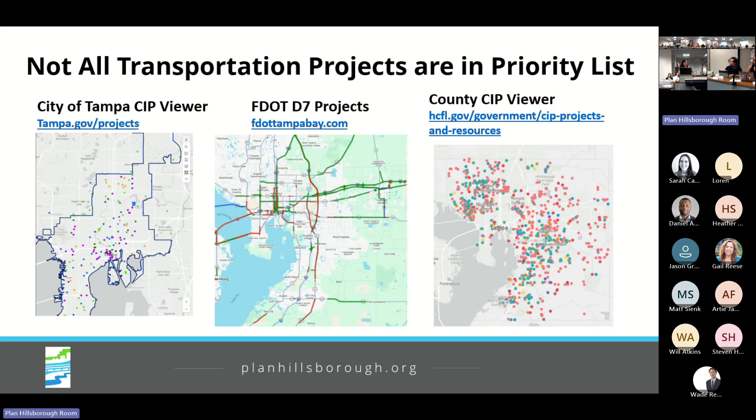I wanted to make sure it was very clear that not all needs or transportation projects are going to be on this list. The TPO priority list is one piece of the puzzle, but our partners at the municipalities as well as DOT have capital improvement programs, 3 of which have viewers online, so you can see all the different capital projects being advanced in the region. But this priority list is really focused on those TPO funding sources, which is about $20 to $25 million per year.

So a couple things have changed since previous years. The first thing is that you're seeing this earlier. Previously we would have brought you the TIP as one item in June and the priority list as another. But this year we're going to separate them a little bit, bring it to you in May, and then we'll talk in more detail in June about the Transportation Improvement Program.

This is a small change, not even a change, but we try to be really intentional about how we call this. You'll notice the dates on the priority list and the TIP look similar in format but different. The priority list is called 28 to 32, because it really informs the TIP you'll see next year, which will be called the 28 to 32 Transportation Improvement Program.

The second major thing that's changed is we've updated the format and added more information as an attempt to have additional transparency, so that anybody who picked up this document could have a better sense of where this project is in its development and what the TPO's recommendation is on it.

So just to walk you through this in greater detail, we have a little bit more than we previously did on that project description. What is it? What is it trying to achieve? We have called out in a tabular way all the project phases to try to communicate what's needed, when is it anticipated, and how much will that phase cost.

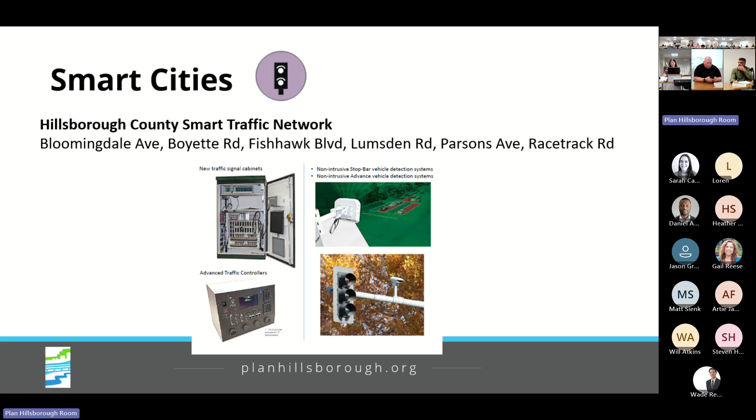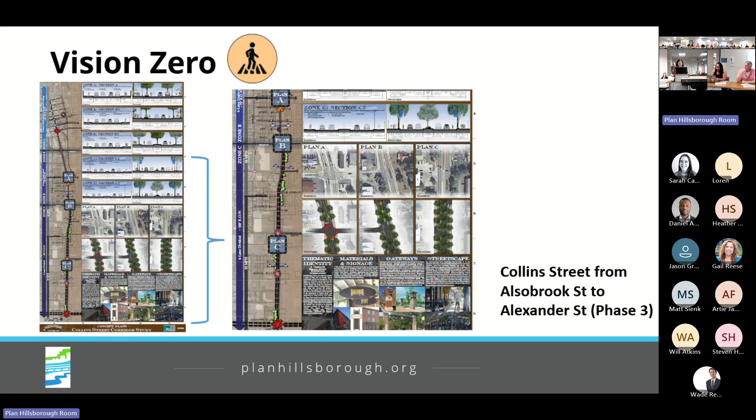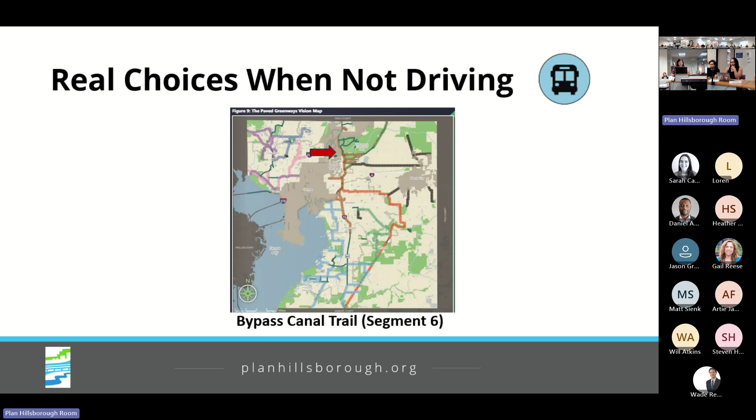We received one application for Real Choices When Not Driving from the county, to construct the Tampa Bypass Canal trail from Morris Bridge Road to Brisby Downs. They're requesting about $2.5 million to finalize that construction, and that project is going to be starting preliminary engineering next year.

To round them out, we had two submissions for major projects. One from the county was the Gibsonton Drive widening. They were requesting state funds called CIGP, the County Incentive Grant Program. Ultimately what they're trying to do is add two lanes, curb and gutter, and sidewalks. Because funding is for PE, the request is lower, so it's $750,000 that we believe could be funded.

Finally was the project from the city of Tampa to reconfigure Ashley Drive. You may recall the city won a grant to get this project going. Phase 1 is funded, but stages 2 and 3 are not. So they submitted a request for $10 million for preliminary engineering and construction. At this point in the list, the funds have run out, so we don't believe that could be funded.

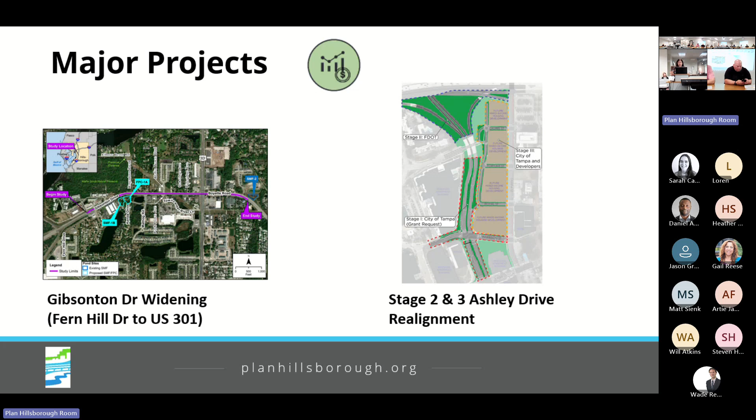To recap the funding recommendation summary, most of the applications we received we believe could be funded given the amount of funding available. There are investments across all modes, whether highways, transit, or safety and sidewalks. There's a nice geographic distribution across the county, and we're continuing to maintain a balance of funding things for construction, so we get them built, but also having a pipeline of funding for design phases so things will continue to come online.

So the recommended action before you today is to recommend the TPO board acceptance of this priority list, but I'm happy to answer any questions you may have.

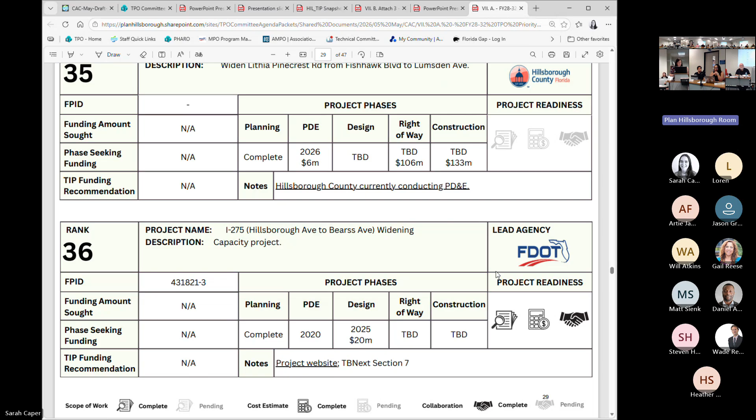Sure, do you want me to share my screen from here? I have it. That would be great. Okay, this is again for the FPID number 431821. So what this is showing is that this is priority number 36. The project name is widening of I-275 from Hillsborough Avenue to Bearss Avenue. The scope is to include a capacity project, so a widening of some sort, details to be determined with the design. The FPID is just the number that DOT uses to track all the projects. The funding amount sought, phase seeking funding, and tip funding recommendation are all not applicable because there's no details on that quite yet.

The PD&E was approved in 2020 and the local design acceptance, the LDCA, location concept and design acceptance, was issued then. A little bit of the design, I think, started in 2024, 2025, but the total estimate for design, I believe, is $20 million. Right of way is unfunded and construction is unfunded.

Okay, can you back up to the design just a moment? This really is just education for me. Now, if 20 million is what is budgeted for the design process, that hasn't been spent? No, it's the estimated - I was looking at DOT's cost feasible plan where they're showing. I'll have to clarify online about that, but DOT is expecting to do design sometime between 2035 and 2040.

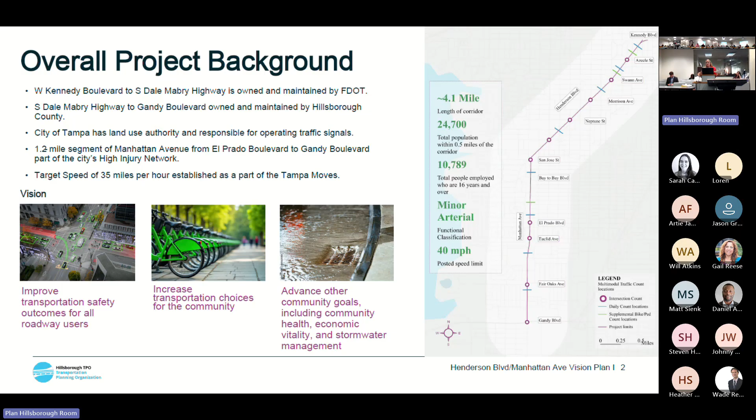We have a lot of other players on this corridor. It's all within the city limits and boundary, but the first segment at the north is owned and maintained by the Department of Transportation. Then there are some city-owned portions, and county-owned and maintained portions on the southern portion. All of them are part of our stakeholder committee and met with us several times over the project, involved in the concepts and recommendations.

I'm covering this really fast. We did lots of data collection - speeds, counts, bike and pedestrian counts, adjacent land uses. We went out in the field for 2 days and dragged our wagon with us, so we experienced what it would be like for anybody rolling the corridor, and traveled it at night too. We also engaged the community, got their feedback, and developed the alternatives.

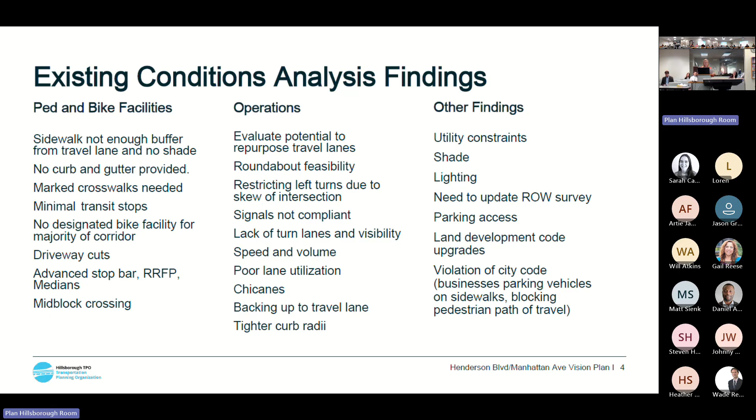Our existing conditions looked at - I'll remind you, this corridor has people parking and driving right on the walking area. The right of way is used for adjacent businesses. It's not like it's supposed to be, not conforming all over the place, and the context changes - some parts are more urban and mixed use, non-residential, while some portions are very residential.

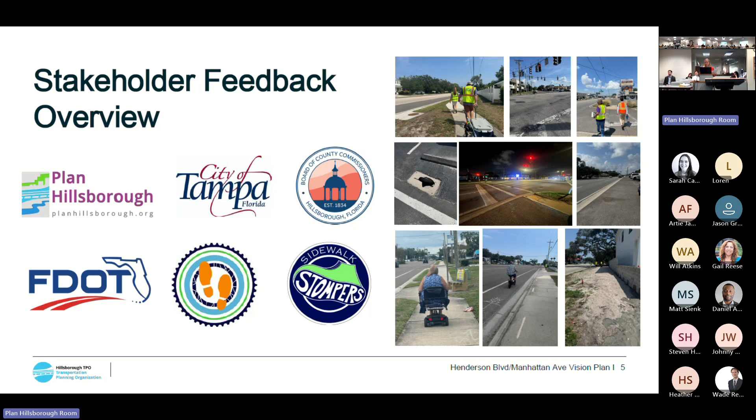Here are some highlights of us going out in the field with the various stakeholders. Not only did we have the 3 jurisdictions involved in the TPO, but we also involved our advocacy groups - Walk Bike Tampa and Sidewalk Stompers assisted us. This was fabulous because we learned about the 5 adjacent schools next to the corridor, and when we were out there, we observed a lot of kids crossing the corridor, so we got to address those safety concerns in our alternatives.

We developed 3 different types of alternatives - one was very pedestrian focused, one had a bike focus, and there was a hybrid. We took those alternatives out to the public and tested them.

You might recall I was inviting you all to the charrette when I was here before, so we hosted a charrette in the community. You can see the roll plots of all the ideas, recommendations, and existing conditions there in the room. We also had a parallel online engagement of the same thing, so you could see the same map and put your comments there if you couldn't come to the charrette. We got lots of emails - my email is all over the website - and we reflected and documented those in the public engagement technical memo.

We had interactive things around the room. The community said slow it down, get all the facilities, special cross-section areas. We wanted to test those out and make sure we were recommending that because there's not a lot of opportunities to safely cross the corridor. We had good attendance, and they identified those 6-legged intersections you might recall - really fun and challenging, with everything at an angle in this corridor, not everything, but a lot of things - and so we got their feedback.

So then we have this lovely, very giant report here that I'm summarizing very quickly, but it's broken into these chapters. If you want to get snoozed, you can read the whole thing if you'd like, but we have our vision, plans, and recommendations that I'm going to walk you through now.

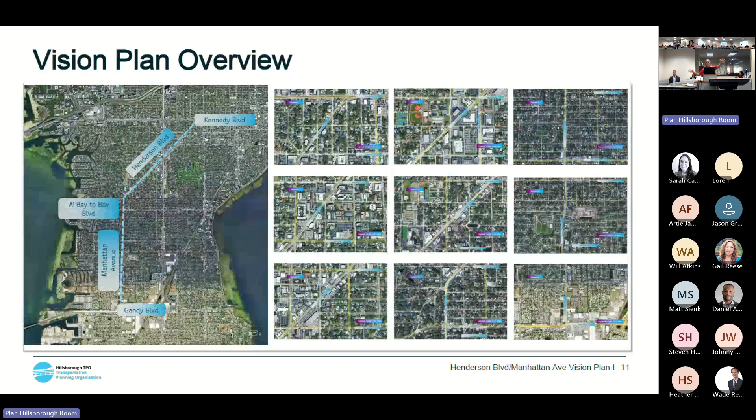The 4 miles is broken up into 9 different segments. I'm going to hit some of the highlights because you have the report attached to your agenda item, but we've looked at adding some medians and some access management in this portion. All right, so starting on the north.

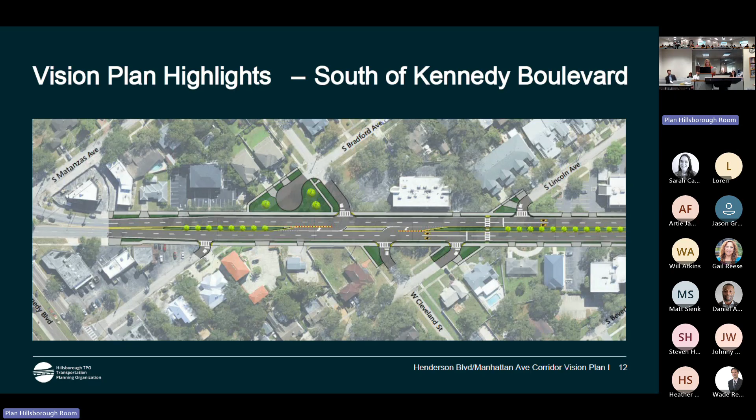Mid-block crossings, refuges, helping with sight distance, looking at some opportunities to realign some intersections to make them safer. There are a series of 2-lane roundabouts proposed along the corridor that will help with speed management. It also helps when you put some medians in, creating great opportunities for an easy U-turn to get back to where you need to go on other portions of the corridor.

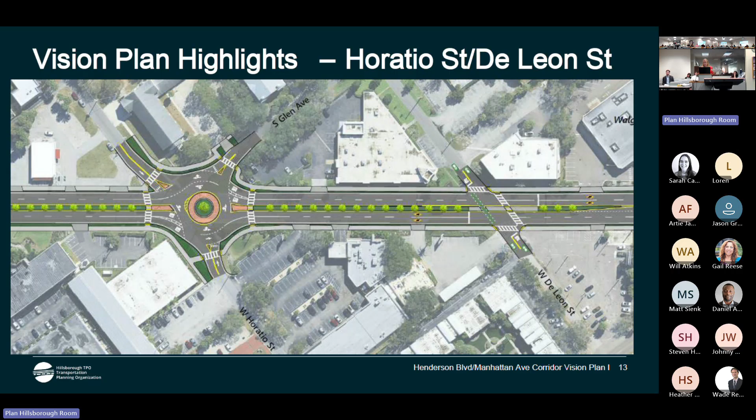Where that's not feasible, there's also these 6-legged intersections. See how we're adding some refuge islands and getting some of the extra pavement area where it's causing confusion and safety issues.

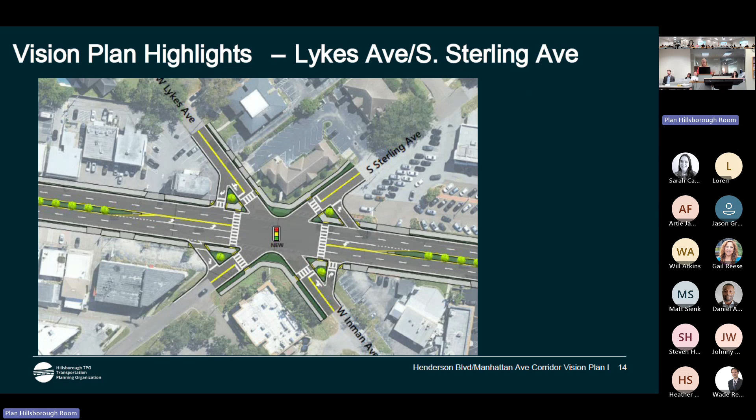This could be redone, and then also the traffic signal timings—there's opportunities to improve that along the corridor. And then some of these, we have a vision to look at considering closing a leg of the roadway, not dissimilar to what's out there in the existing condition with Morrison.

Here at Morrison, it's a lovely, slow, bike-friendly roadway, but it is not easy to get across this corridor if you're on a bike. So we're saying, let's stripe that and make it a special designated area, add a bike signal and traffic signal, so they have their go and can get across.

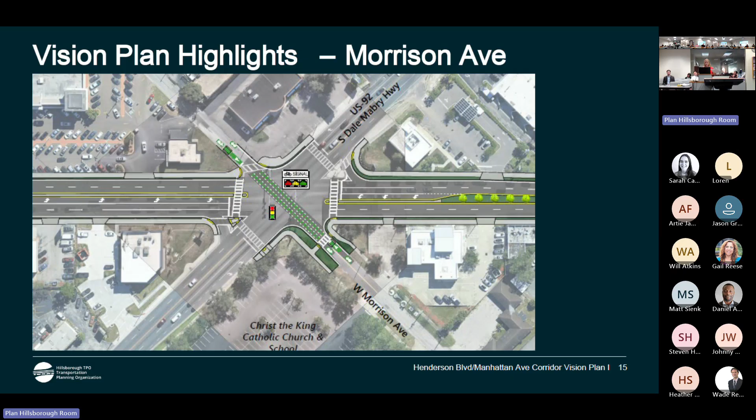So enhancements there. Like I mentioned, you can see the mid-block crossings here, added strategically along the corridor. Again, we fleshed all these ideas out with our stakeholders, so they match up the things.

And then we took a lot of proposed adjacent studies and reflected and analyzed those. There's some stormwater projects, some traffic calming projects, some other safety improvements in the area. Those were all baked into the recommendations.

The southern portion of the corridor has some existing bike lanes. So for that one, we're thinking let's narrow the lanes a little bit and add some buffer, because that'll make it much more comfortable and safe.

Mentioned the illegal parking on the roadway and stuff, so we're proposing something in the interim—maybe some paint or texture treatments we could do to define that pedestrian area better, because it's not like tomorrow we can go out and fix all these non-conforming land uses.

It is a vision plan, so it's got several next steps that are going to be necessary to turn this into reality, including—I think the survey is dated 1941, so it does not really match and it's not super accurate. We'd have to start there to even be able to start doing design plans.

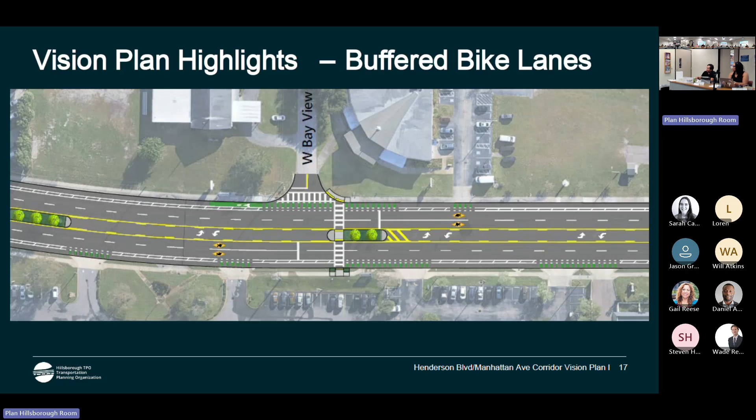Piggybacking off the question about right of way that was discussed earlier - is your intent to work with the planning commission on land use, and would that offset some of the private right of way you'd need? Or do you think a lot of the private right of way is still going to be the same? The report mentioned needing $55.7 million for right of way acquisition, so I'm assuming that's only the tips of private lots, or how does that work?

I don't know if that's the correct number, but the 2-lane roundabouts would clip some corners of private property. You can see on these parcels that some can't build back, so we need bigger vision to solve this appropriately, especially given that many private properties have encroached into the public right of way. It's going to take some creative solutions.

We're saying we need to take a deeper dive and look at that - it's not going to be solved in a 1-year project, and that's only looking at the roadway portion. I'm hopeful that the code updates and corridor applications, since this isn't the only place in Tampa this exists, the big brainiacs on the code team are helping come up with those solutions. After they do, let's start looking at how and what's appropriate to apply here. It may have to be picked up through every rezoning, but if you don't have something on the plan to strive for, they can't work to implement it.

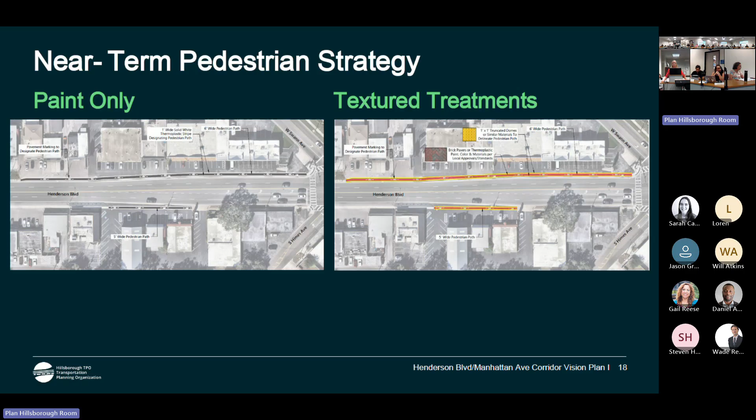There it is, thank you. I can read it, you anticipated me. Recommended action: recommend the TPO board approve the Henderson Boulevard Manhattan Avenue Vision Plan.

Sarah, enabling motion. Looks like the whole room. Susie, I'll pick on you to make the enabling motion, and there's a second from Chris Vella. Okay, we can all argue about it later. Any further discussion in the room on the motion?

No? Any discussion online? Anyone online on the motion? All right, by acclamation then, all in favor of the motion signify by aye. Aye. Any opposed, same sign. All right, you have a unanimous approval, Lisa.

I'll take it. Okay, that takes us out of action items now, and we are in status reports. Local roadways countermeasures, Matthew Pleasant. Before Matt starts, Wyatt Burchell of our staff is going to introduce the project and turn it over to Matt.

Good evening, CAC. Wyatt Burchell, TPO staff. As you know, Hillsborough County's transportation network is particularly vulnerable to impacts like extreme heat, flooding, and other hazards.

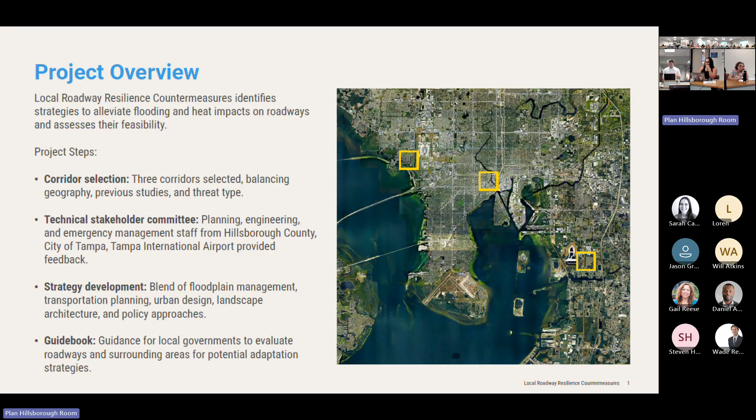So just to talk about what we mean by countermeasure a little bit, and also why we care: the threats we're facing right now are really flooding and heat. We've already had a record this year for the earliest calendar day to have 90 degrees. Last year we had a record, first time ever we've hit 100 degrees. The heat index has been in that range before, but that was the first time with 100 degrees.

Part of the reason why we care is there's an impact on the people using the roads, and there's also an impact on the infrastructure itself. So it being hot, that impacts travel decisions every day, timing of trips. Someone might be less likely to make a trip if they're reliant on walking and biking.

And then the wear just ages the roadway over time. These are things that are already affecting the roadway, but we're seeing this increasingly, and it impacts the lifespan of the roadway.

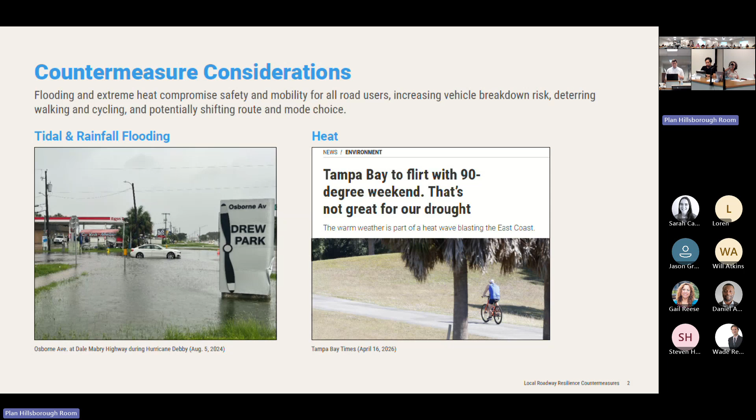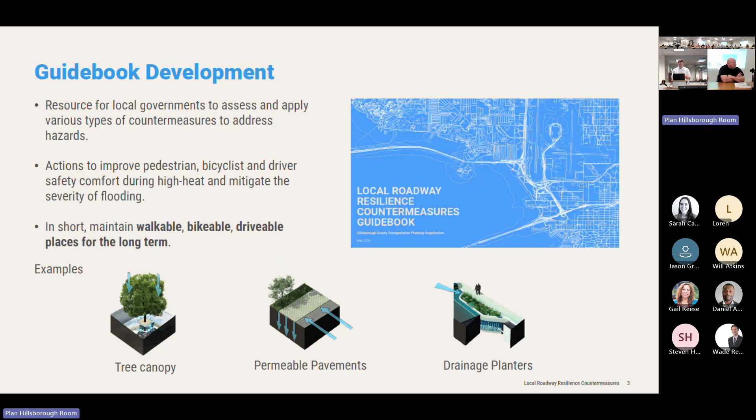We'll be wrapping that up now and back in June. So just a couple of real world examples to talk about.

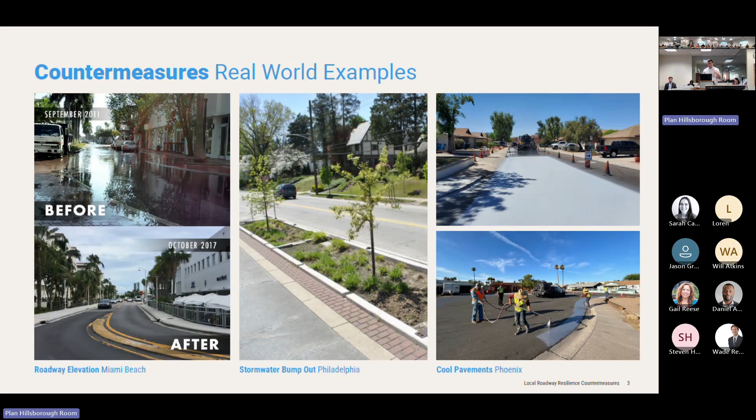So we'll go through the representative corridors here. The first one is Dana Shores Drive in Town 'n' Country. This is representative of tidal and rainfall flooding. It was closed during Hurricane Debby because of the flooding.

I found out about that later - we actually picked it because it was highlighted in the Tampa Vulnerability Assessment. It's actually maintained by Hillsborough County. This is the jurisdictional line that runs along Dana Shores Drive, so it's split between two jurisdictions. The county maintains the canal streets to the south.

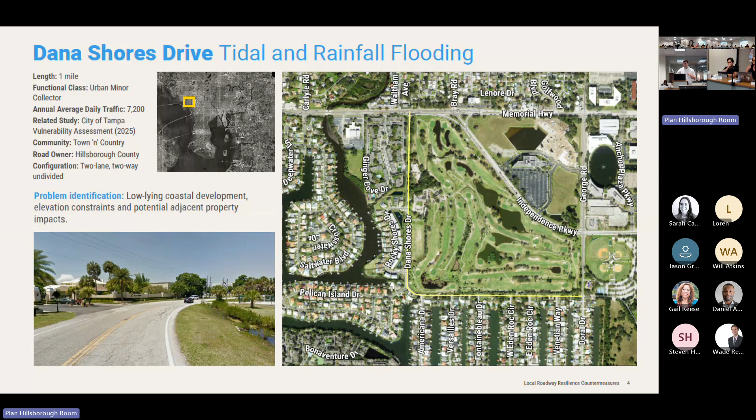These are some things we heard from our stakeholder committee members on the street. We talked about roadway elevations in this area - they said it's been brought up before, but most of the time it's not feasible to elevate a road because you require land for the water that you're displacing. So you're going to displace floodplain if you go in and elevate the road, but you've got to put it somewhere. And when you're in this kind of area, it's really physically constrained.

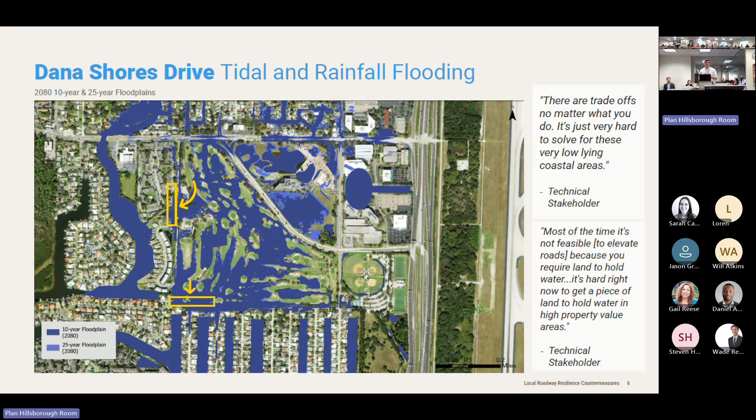You got to find a place to put it. We did talk in conversation about the potential Rocky Point golf course, maybe finding a way to store it there. Maybe instead of 18 holes, it's 16 holes. I don't know, but that's kind of the coastal representative corridor.

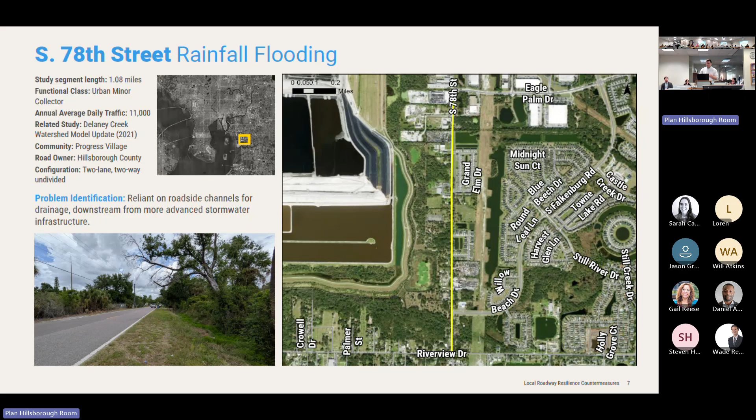This is 78th Street in South County in the Progress Village. We picked this after looking at the floodplain models for the county, the Delaney Creek watershed. We specifically focused in on 78th, which is a much longer corridor, focusing on Eagle Palm Drive and south to Riverview Drive.

We found there's an area right around Eagle Palm Drive where the flooding is particularly bad, and we validated that by going out to the corridor and talking to people.

This area and the wider area, this is Oak Creek, the development here on the right. It's a much more highly engineered stormwater management system.

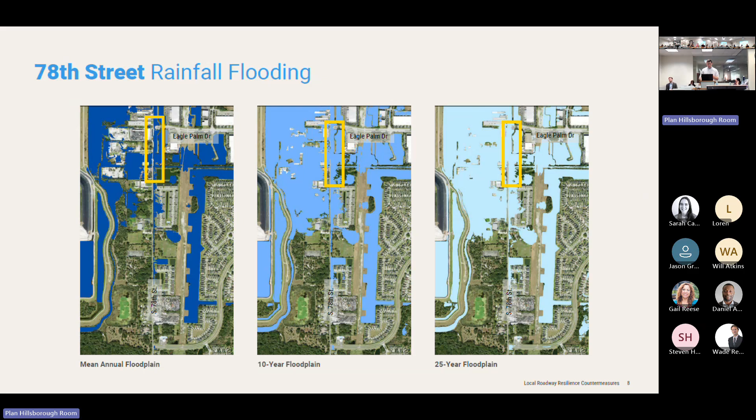That system, and also the swale system on 78th Street, is highly reliant on Archie Creek and kind of drains. So we think it's just backing up there, and with higher volume events it's sort of backing up and causing the flooding that's there.

Digging into the depth of flooding, there are portions where we're talking in inches. There's a lot of tough areas of flooding in the county, and it's kind of sparking discussion on level of service, floodplain level of service.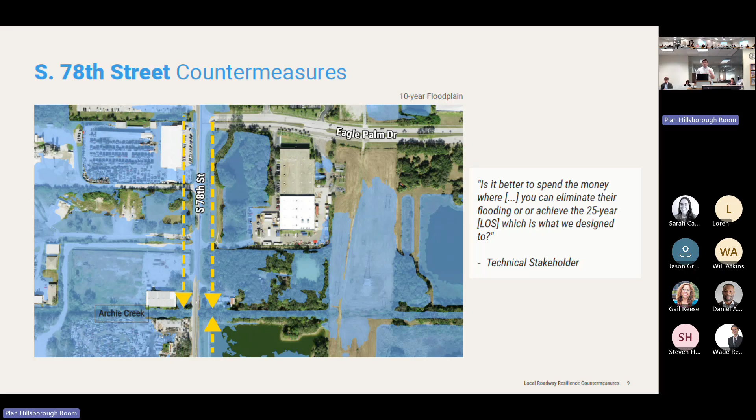Stakeholder committee members said that it's better to spend the money where you can eliminate flooding or achieve the 25-year level of service that we designed to. So that was one of the comments.

Finally, North Boulevard. This was chosen because it's highlighted in the Tampa Heat playbook as being very vulnerable to heat, due to minimal canopy, high land surface temperatures, and limited access to cooling centers, among other factors. We looked specifically at the north section, north of 275, next to Blake High School, with a Publix on the other side, and then down to Cypress.

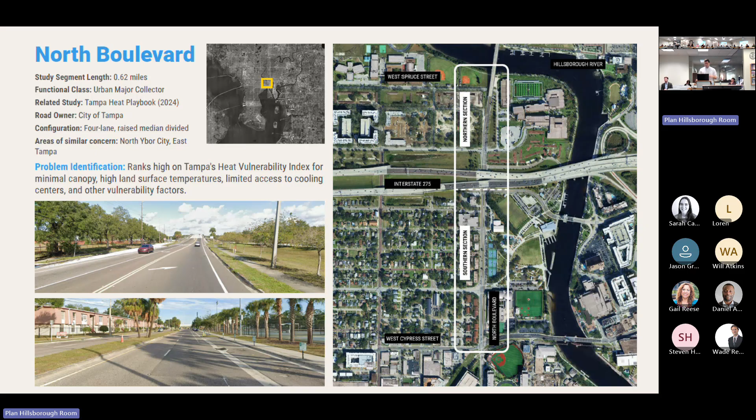We also want to include in the guidebook a bit about the diagnosis framework you work through for a corridor. These are some of the things you'll find in there.

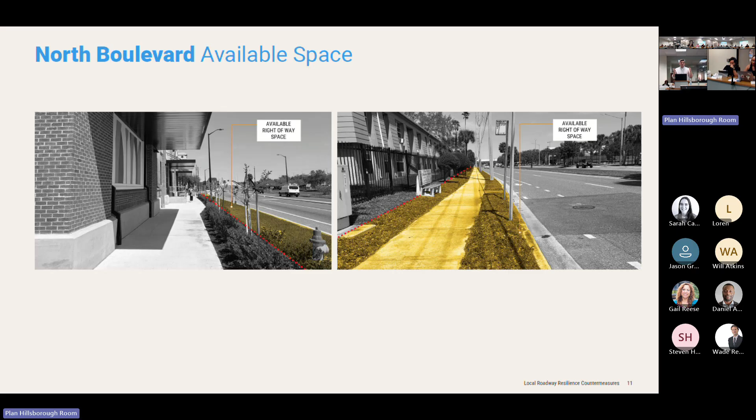We're looking at the available right-of-way space and how much of that is paved versus unpaved. The presence of overhead power lines is a big limiting factor to your tree canopy.

You can see the first apartments there that are supposed to be redeveloped, with the power lines there. So maybe there's an opportunity to bury those in the future and actually have tree canopy on that side of North Boulevard.

And then just looking at the ground conditions, whether that's the actual soil around the tree—there's a struggling tree area outside the high school. We would expect it to look a little bit better, but it doesn't, for some reason. Maybe it's just the drought, or it could be something with soil compaction, it's bad soil.

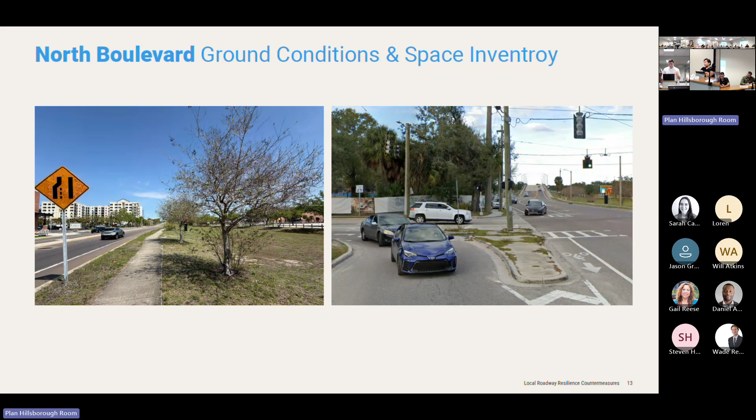And then there are areas where you can actually strip out some materials. We have a pork chop island there that we can turn into something. With heat, you're really just trying to think about those surfaces and where you put in permeable surfaces that are going to reduce that heat.

So we're compiling the guidebook, and we're going to conceptually apply those to the corridors while being realistic about what we can achieve. But we have some pretty tough challenges, and data shortages are a pretty tough issue without a lot of high-dollar interventions. So we want to be realistic about framing what we can do with these, and then bring that back to you in terms of production.

And with that, thank you very much, and happy to answer any questions.

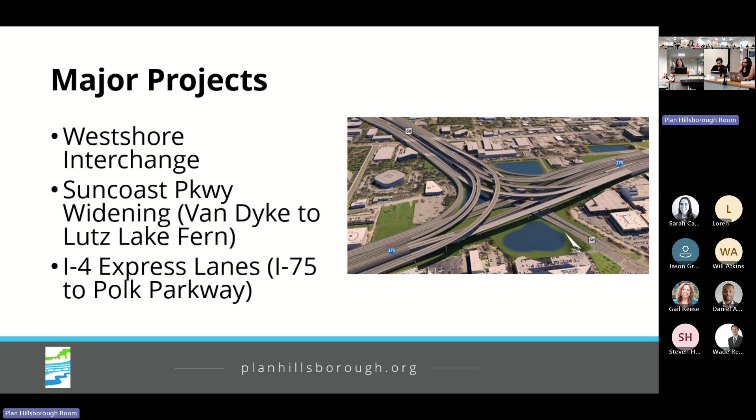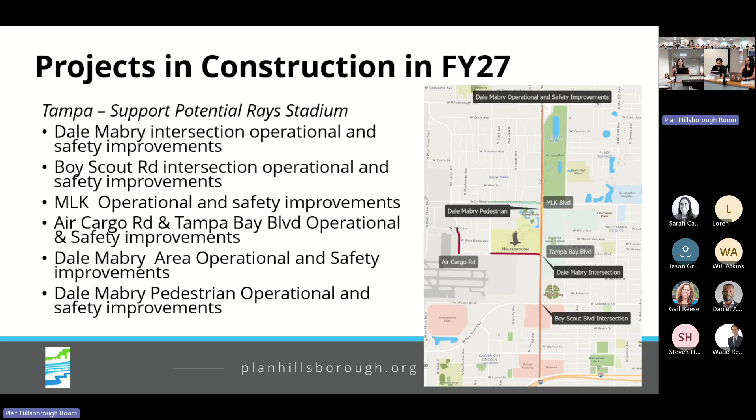Something else you may be interested in is there are 6 proposed projects to support the potential Rays Stadium. As you can imagine, these things are moving very quickly and a lot of decisions need to be made. But there are 6 projects proposed, totaling about $23 million, to support that development if it goes through.

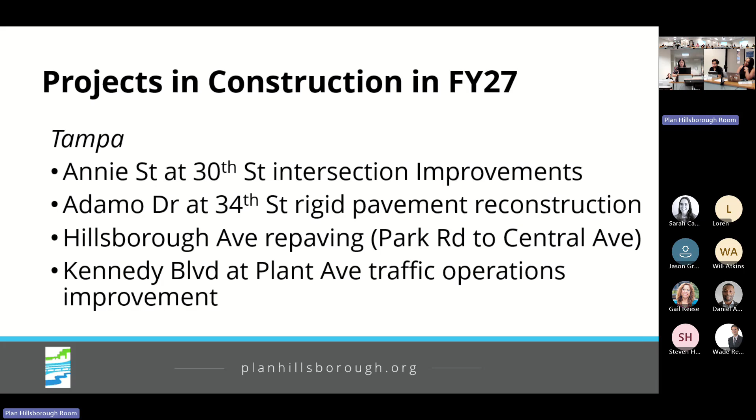I've also broken out some projects by what I thought you might be interested in, like what's going to construction. I won't spend time on this because again, I really want your feedback on whether we want to talk about projects in construction or talk about it by project type.

So again, we're going to have a meeting that's optional on May 20th to dive deep into specific projects if you want to do that. If you want to talk about process or programmatic issues, whatever your needs are, it's my goal to meet those. And we'll have another discussion at the June 3rd meeting where you'll be asked to make a recommendation to the TPO board.

Okay, all right. Left side.

Question, comment, Jamie? I'm very interested in all of the Rays projects. Thank you.

My kind of question. All right, anything else here on the left? Nope. By the way, before I forget, for the record, Andrew Marchetti walked in at about 10 or 15 minutes into the meeting. I don't think we actually announced that. Yeah, okay, I just want to make sure he's on the record as having been here, right? I apologize for not having called that out earlier. All right, left side, we're good.

Right side, Chris Vella. What is the absolute latest that I can recommend a format change in the TIP document? Because you have projects that are intersecting with the urban expansion area planning study, and a lot of people don't want that project or that study to really move forward. So I think it'd be important that the commissioners would be able to say, oh, these projects relate to a study that we have in the planning commission. Why are we approving roads before the actual plan is approved by the county residents? So is there any way, is it even feasible for me to even pursue that with you, or work with you on a format, just to make a note in the actual table, and maybe print it out or PDF it to say that these relate to, these go through the area study by the planning commission?